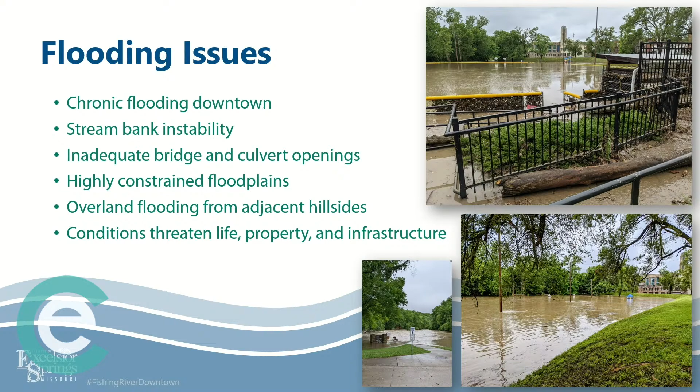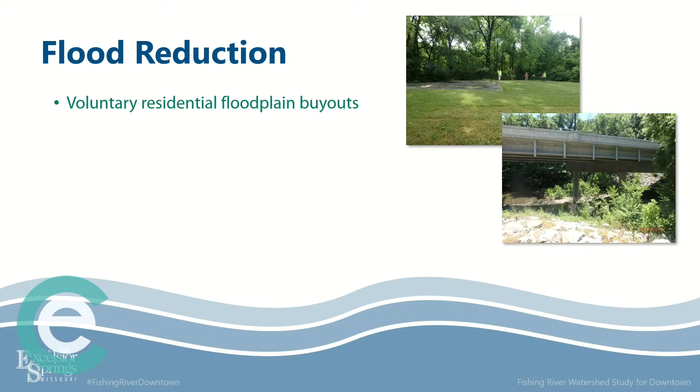So what do we do about that, and what has the city been doing? The city back in '93, when you had the major flood, actually went out and bought several properties. You'll see the properties on the maps. All the light purple shading on all the various maps is the city-owned properties. A lot of those are flood buyouts.

Creation of the Fishing River Linear Trail. If we can pull things back away from our creeks, give them some room to move, give them some room to flood, we can help not have that flooding somewhere else. They're not flooding all the time, so why not make them into a park so they're multi-use? So that's what the Fishing River Linear Trail does. Bridge improvements and replacements: as the city can get the money, and as they're working through studying and figuring out which bridges take priority, they get those bridges and various culverts taken care of.

Then our watershed study. So the goal behind this was to basically identify a comprehensive program that would address trying to reduce flooding within the downtown Excelsior Springs area. We want to look at reducing the frequency as well as the severity of flooding. And you'll hear as we go through how our projects can hopefully help to do that. We want to protect downtown properties, the businesses, and the infrastructure. So we're trying to make it better for everybody that has a vested interest here in downtown Excelsior.

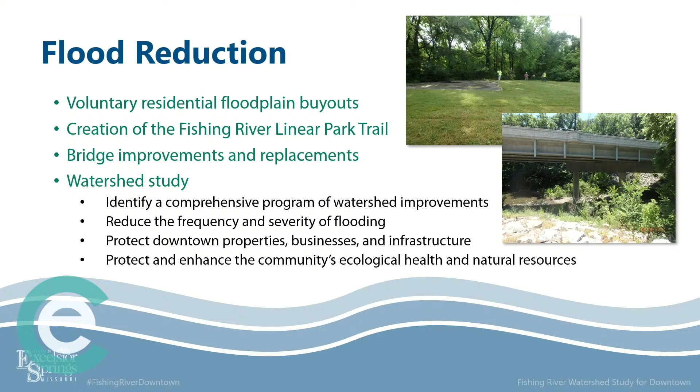And then we want to protect and enhance the community's ecological health. We all know that while we can build stuff and protect stuff, nature has been doing a lot of this for a long time. Nature knows what she's doing. We can actually use both our engineering solutions as well as integrating nature to help us solve some of these problems. And it makes for a much better community. You guys have a wonderful trail system with the parks that you have along the creeks. We want to take advantage of that. And you'll hear a little bit more about one of the projects that's going to do that right off the bat.

So what has been our planning process? We basically started this off with looking at what the existing conditions are. That was going out to all the various sites where we've seen that there are issues with flooding. It's also looking at the creeks. Both Beck and I were out in most of the creeks here within the community, and Beth and Julie spent quite a bit of time looking at bridges and culverts and things that might be causing constrictions or other things that were influencing flow of water.

So we pull all that together, but we also took the time to make certain that we were talking to the community. Some of you, I believe we met at the Watershed back in June, where we had tables out and we were talking to people about what the study would entail. And we also had another community meeting back in September where we had started to talk about our potential solutions.

We looked at the whole 2 watersheds, and this is the Dry Fork, which is your north-south watershed, and the East Fork, which is your kind of east-west. It kind of does a little bit of north, south, east, and west, but the one that comes in from the east side of the city. So we looked at those 2 watersheds, and we're looking at all kinds of options. You'll see a map here shortly that'll show you that. But we know we can't put everything everywhere. It gets too costly, it doesn't make sense, it's not effective. So we pulled those potential solutions into more refined preliminary alternatives, which we'll get into.

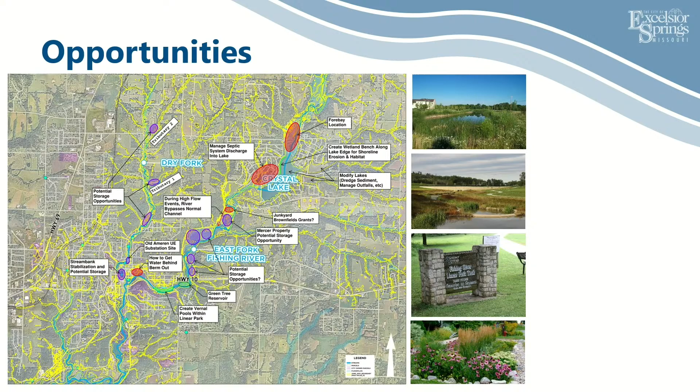So I mentioned earlier that we started with a big picture. Well, these are the two watersheds. The Dry Fork is your north-south, and Crystal Lakes is on East Fork, so it's your east-west. And we had all kinds of thoughts based on just putting engineers and ecologists and landscape designers together. We had lots of thoughts for lots of opportunities. It's great, but they're not cost-effective when you start spreading them out too far. So we started looking at more refined project areas.

We have Project Area 1, which is on the Dry Fork. It's this little spot right here. And it actually is a greenway. So it'll be very much like your little park that you have over here along East Fork. We also are looking at improving Main Street. Main Street has a low water crossing. That low water crossing doesn't work very well. So we're looking at ways to make that low water crossing more effective and function better and actually help with our stormwater management. Site number 2 is Tributary 1.

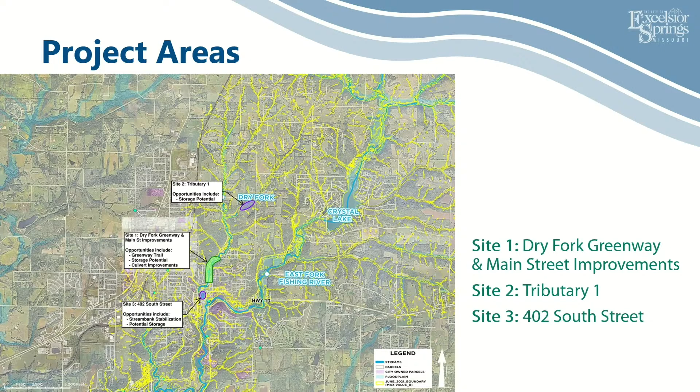This is actually just outside the city limits of Excelsior Springs, and it's a great opportunity along a main tributary to Dry Fork that actually contributes quite a bit of water. Site number 3 is South Street. It's the old auto dealer, United Auto. And it's right next to the Albany Hotel. You'll hear more about each of these projects from both Beth and Becca, sorry. Sure, I am.

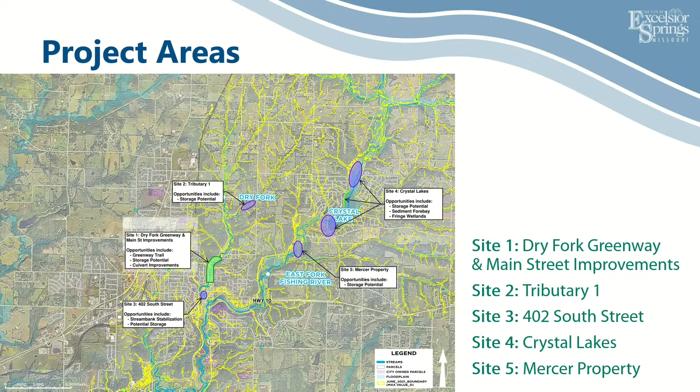Site number 4 is Crystal Lakes. That's our big partner right here. And then our 5th site was the Mercer property. Now, as we went through and looked at these, all of these sites looked very viable, but we will tell you right off the bat that Site 5, the Mercer property, basically did not make sense. We couldn't store enough water on that site and do anything to really help, so we actually pulled that site out of the rest of our evaluation. The other 4 sites we've continued to evaluate. And with that, I'm going to turn it over to Beth and Becca.

Well, actually, I'm just going to talk about this slide real quick, and then I'm going to let Julie do a little bit of talking today. So that's kind of new for me.

What we're talking about here is, from an engineering perspective, we built this really big model to get to know the existing conditions of the watershed. But we actually had to go out into the creeks as well to understand the existing conditions. We went out and visualized and made some measurements on all these bridges and culverts out there to, like Lori was mentioning before, understand better what constraints might be, but also to make sure we were representing them all in our analysis.

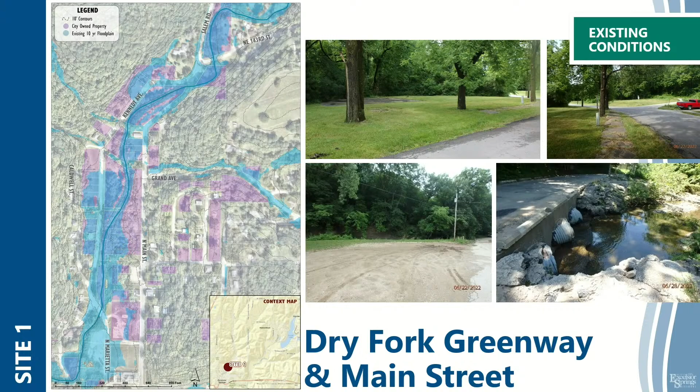So obviously this is Main Street, and the low water crossing there, I'm sure you're all familiar with, does not work very well. It is very undersized and not really designed to pass any storm through there. So that's what the existing conditions look like, and it causes a lot of safety hazards with road closures and flooding properties.

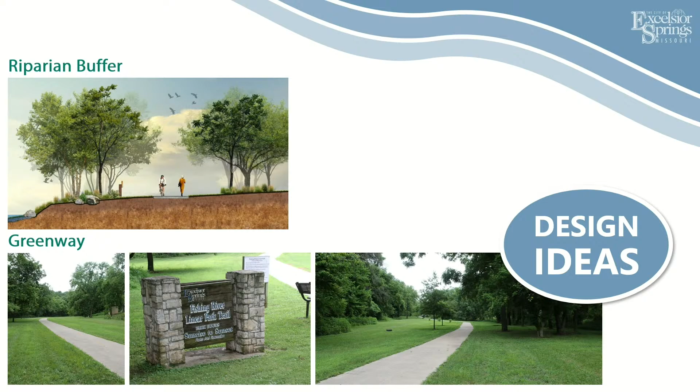As far as our modeling efforts went, the main design parameter we were focusing on was how do we upgrade that low water crossing into something that's usable, and that led us to raising Main Street, raising the profile of the road to allow space for a bigger culvert through there.

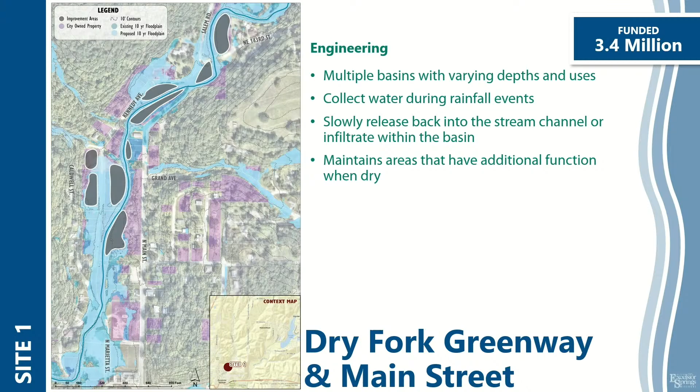These gray areas you see on here are going to be mostly dry detention basins. A common concept we kept coming back to was how can we reconnect the stream with its natural floodplain. We know it wants to come out of its banks anyway, so the longer we can keep it there and not send it all downstream at once, the better the effects will be. So the culvert replacement we did is higher up, but it still passes through the lower events.

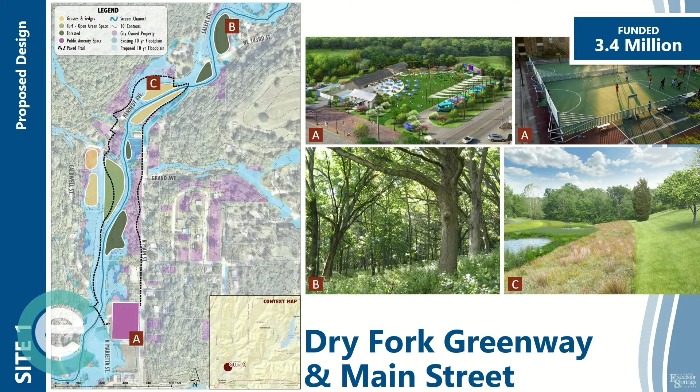I should say, before we move on, this project has already gone out with a grant and is already funded. So you can see it across the top there. But we're very excited that this project is moving forward. So all of the things that we ask you to write on the board, we mean it.

We really want to know what we want to put in that bottom space so that we can start putting those ideas to work. And we will say that the funding actually goes towards construction of the greenway, not towards the public amenities in that lower space, but we want to give the Parks Department an idea of what they could look at to be able to put in that space.

So the next area that we looked at was Tributary 1, that we were calling it. It's a pretty major tributary that flows into Dry Fork. It accounts for about 40% of the total flows of the Dry Fork reach. And we were excited about this because it is one single parcel, so it provides us an exciting opportunity to work together with the community a little bit to come up with a nice solution for everyone.

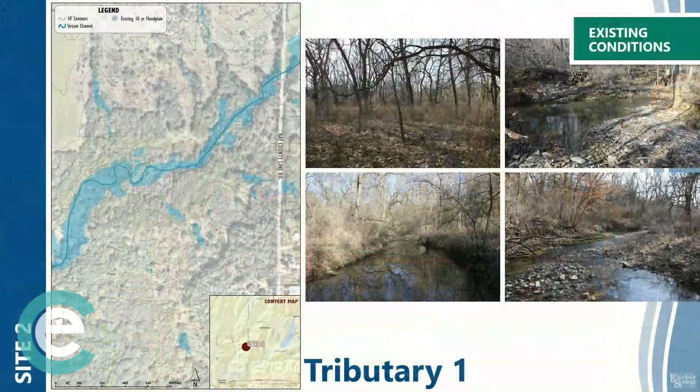As you can see, the creek is actually really healthy out here. It looks really nice. Yeah, so it's kind of a nice area to expand a little bit. So in our design ideas here, of course this is one single property owner, so we're really looking to maximize their space and making sure that we're putting back natural spaces like what were there previously.

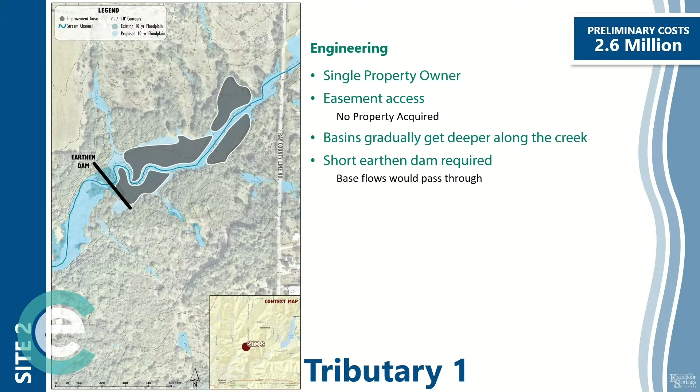Again, grading out those areas to kind of reconnect with the floodplain a little bit, letting the water spread out. And so these are primarily dry detention, but during larger events it will be inundated. But that earthen dam there that we have pictured, it's going to be able to pass regular flows, so it's not going to have any negative upstream effects, and it'll keep that creek healthy like it wants to be.

So just like we showed before, those colors are going to be the same across the board. So those on the left of this site are going to be more of those grasses and sedges. So as more water is in that space, they're able to take that flow. And we'll keep the forested sections up above a little bit.

And so you can see in the images, the dry condition, the wet condition. Basically all we're talking about is when there's a big rain event, that water will rise, those trees will hang out, stay in a little bit of water for a while, and as that water is able to either rejoin the creek or is absorbed into the ground, that water will fall and it'll just be a dry basin, as Julie has mentioned previously.

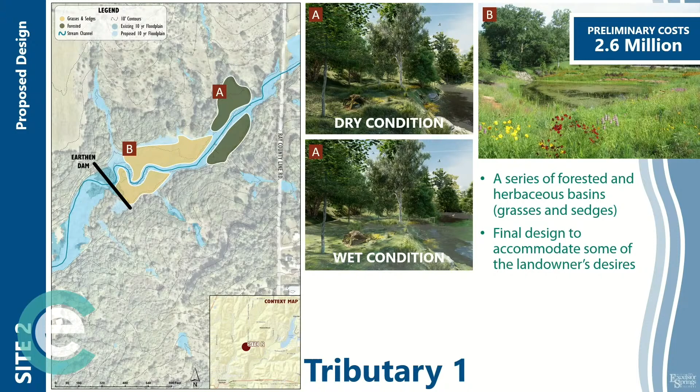And we are working with that landowner to kind of accommodate the desires for that space to make sure that what we're putting back is up to snuff for what they're looking for.

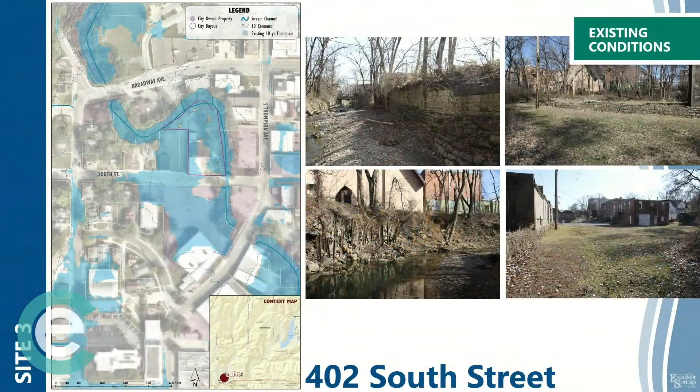Okay, this site is downtown on South Street. Existing conditions, you can kind of see a lot with the floodplain mapping. The banks are hard armored and high. So that floodplain connectivity we're talking about, we're not getting a lot of that. And instead you can kind of see where the flood comes out and crosses over versus moving around the bend.

It's also a pretty significant meander in the creek, and we're seeing that there's been some pretty good erosion on that outer bend, on that north bank. There's been some countermeasures taken. So erosion's a concern, and we experience it a lot when the creek is confined within its banks.

So here we're looking at some more of that overbank grading. We're really big into floodplain connectivity, letting the more frequent flood events get out into its banks and spread out. So here there's a great opportunity for that to happen. An inner bend of a creek is perfect. That's where you want to cut it down and let the creek flood out. It will alleviate some of those stresses that are on that outer bank, so it will kind of help with that erosion protection.

Of course, you still need some hard armoring in a case like this. But yeah, we're looking at basically that gray blob there. That's where we're looking at cutting down the bank, letting the creek flood out of its banks, and then maybe taking out what we're calling a gabion wall on that north bank and putting in a retaining wall to hold that up a little bit better.

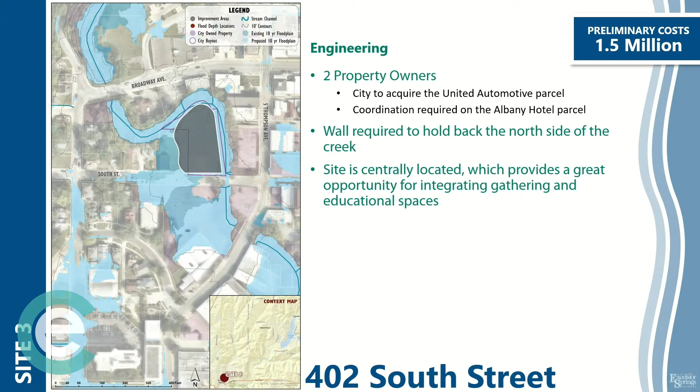Yeah, so just by cutting down that bank quite a bit, we were able to really see some flow attenuation and some holding back of that water, which is what we're looking for. We zoomed in a little bit, so we can't see as much of the outside flooding, but we're kind of in this site now. And we talked several times earlier about how we can make these spaces not only work for us stormwater-wise, but how they can be public amenities. And we really liked this space for that.

It's centrally located. There's a lot going around it. There's the parking lot and the hitch lot that gives good accessibility. But as Beth talked about, we're talking about cutting down around the creek, not into the creek. So we have that lower terrace in that lighter yellow, and then we will continue to terrace up. So that will hold our banks in, and we will be able to use that top section as a gathering space or even an educational space, both for how Excelsior Springs floods, but also how the water systems work.

But with our site, we have kind of this alternate side, if you just turn around from where we're standing at that purple dot of the Albany Hotel and the hitch lot itself. We really want to honor the history of what's going on in our area, and this is an optimal place to do that. So by putting in something like A and C of seating and berming and then educational signage, we really can pull all of these features together into one usable space.

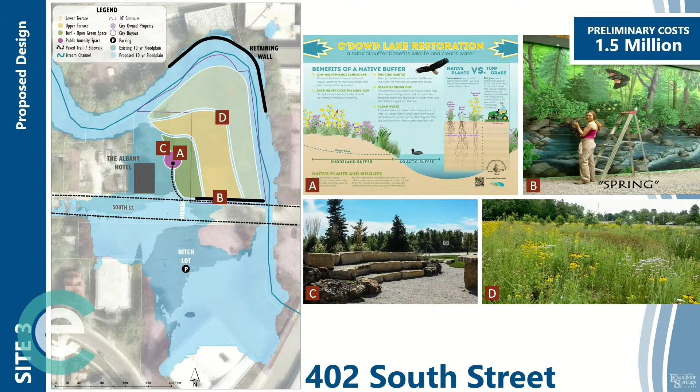So Crystal Lakes is really the only opportunity we looked at on East Fork. I mean, it was staring us right in the face. It's an existing lake. Lakes are meant to hold back water. So we initially ran our model and saw some modifications to the spillway and the outlet will do wonders. It holds back extra water. We're getting more storage without impacting any of the homes around there.

But through conversations and through our site visits, we learned that there's a lot of sediment that has built up in Crystal Lakes over time, so much that you can see it from Google Earth. So perhaps just going in and lowering the spillway and lowering that normal pool and exposing more of that sediment is maybe not as easy an opportunity as we thought it was.

But our initial thought on this, did you? No, you go for it.

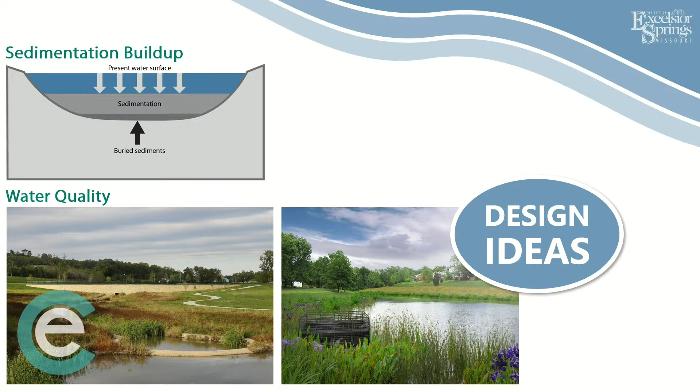Keep going. Well, we talked about the excitement of implementing all these water quality features, but then we really decided to dig into the sediment issue, because we wanted to make sure we don't put an improvement project in only to have something look worse and not really satisfy the needs of the people living on the lake. So we did our due diligence.

First of all, the engineering we came up with was lowering the outfall a foot, raising the spillway, creating a sediment forebay to trap the sediment, which is essentially what's happening naturally. But we went out and did a bathymetric survey, and we flew some LiDAR to get an idea of how much sediment we were actually dealing with. And so you can kind of see, this is a digital elevation model that resulted from that boat we showed pictured, what they captured using really high-tech stuff.

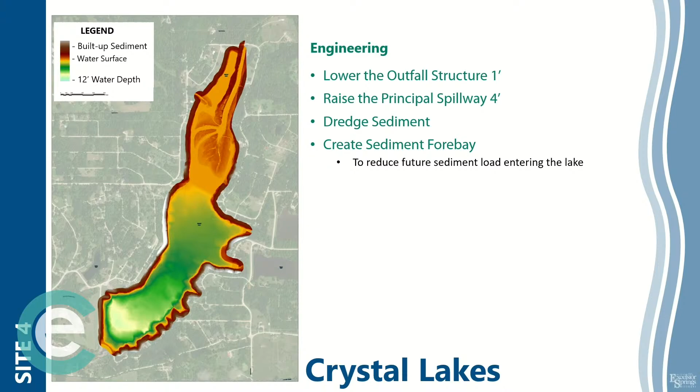Essentially the deepest part of the lake has about 12 feet of water, and it's my understanding that this lake should be at least 20 or so feet deep at that point. So there's quite a bit of sediment built up. So that then became our focus: what kind of sediment are we dealing with? So we looked at a couple scenarios. One in which, how much would we have to remove from this lake to get it back to day one of Crystal Lakes? And that number came out to be roughly 2 million cubic yards, if you have a hard time picturing what a cubic yard is.

So I think this is credited to Becca. She went ahead and showed us how much 270 cubic yards is. It's approximately a boxcar. So we thought we'd look at this in trains traveling down the track. So 2 million cubic yards will get you about 84 miles of train.

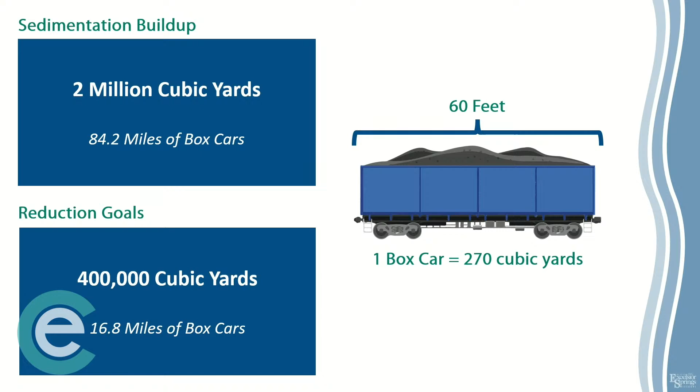And then we're showing this 400,000 cubic yards here too, because that is the minimum amount of sediment we would have to remove to counter that reduction in the lake of a foot, just to keep things as existing or better. So, another visualization for you.

How far is 84 miles? From the Elms to Sedalia, the fairgrounds specifically. And then the 400,000 cubic yards is still 16.8 miles of boxcars. Then you're only going to Richmond, yeah. So we thought that was an interesting little side exercise, and kind of taught us a lot about Crystal Lakes.

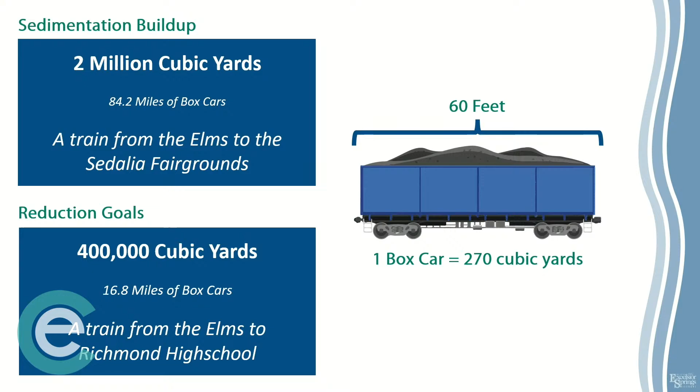And these depth reductions are from one of our modeled scenarios, which was a 10% chance event, commonly referred to as a 10-year storm, which is roughly about 4 inches of rainfall over a 6-hour time period. We used this one because we were really seeing the best results with our 10-year event. Once we got to larger flood events, those reductions kind of slowed down a little bit. And also to put the 10-year storm into perspective, most design criteria, residential streets are designed to stay dry during a 10-year event. So I thought it was a pretty good design storm to work with.

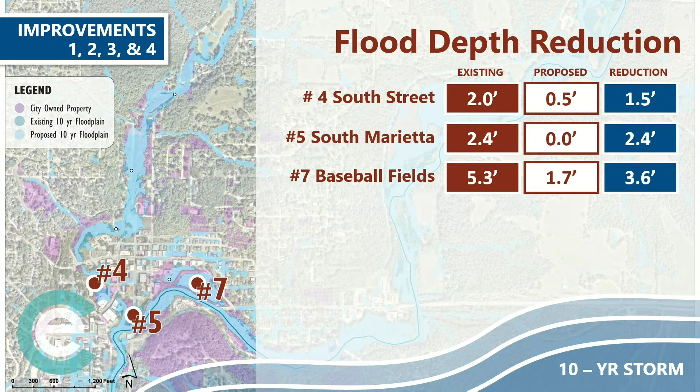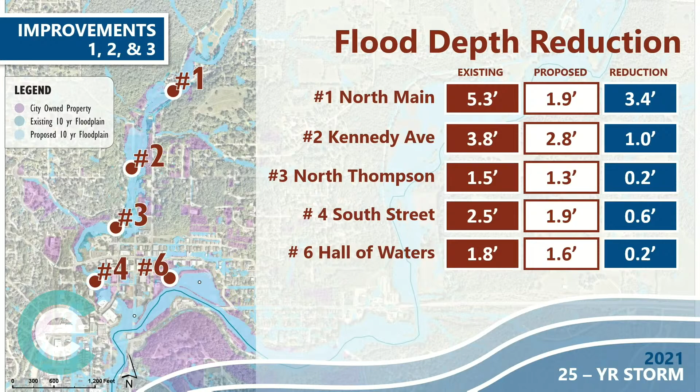So you've gotten to see all of the projects that we talked about, focusing on the 4 primary areas. We talked earlier just briefly about small solutions to large solutions, short-term to long-term. You will see all of these projects on the boards over here. As you can see from what we were talking about, our short term, we have the Dry Fork Greenway and the Main Street improvements, so that's right off the bat. That's funded. That will happen. The design will happen this year. Hopefully it'll even go into construction this year.

Going on to the other project sites, we'll have to figure out where we are going to get the funding to be able to make those happen. That's where I was talking earlier about partners, whether it's partners that can actually help to make some of these things happen or partners that can provide funding. We need other resources to help the city to actually make these projects a reality, just like the Dry Fork Greenway and the Main Street improvements.

Whether we can get additional ARPA funding, don't know, but we'll continue to look and the city will continue to look. And I will say Molly's always been awesome about finding grants and other things to help make things happen. So you have great resources within your city administration. So I would say if there's a chance of this happening, you guys have a great chance of these kinds of things happening.

As far as next steps, we're finalizing the document, and part of that includes what we're hearing from you tonight. We intend to finish the document by the end of this month and get it to the city for them to be able to review, and we'll address any comments once they've had a chance to look at it. We are continuing to post our information on the website. Everything that's here tonight will be available to the city so that it can be posted on the website. So you can share it with friends and neighbors that maybe weren't able to be here tonight, or as you have questions, you'll be able to take a look back at that information.